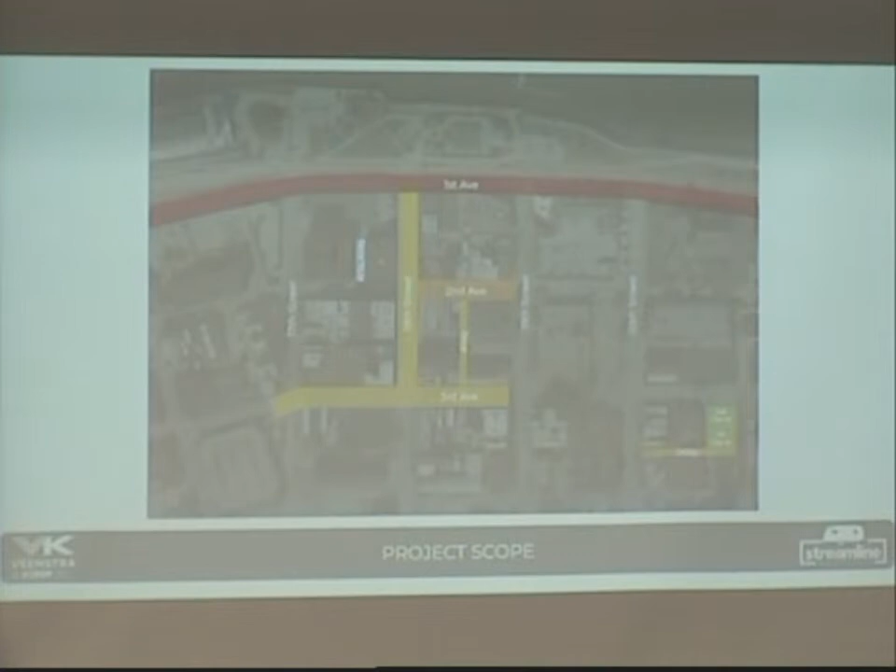Then when we had the online form, the 423 responses, the results were pretty similar. 55 and older made up 32%, 35 to 44 was 24%, and almost 20% was 45 to 54.

During the public meeting, for gender, there was 58% female, 41% male participating. Pretty similar in the Google online forms for female to male ratio.

At the public meeting, we polled everyone to ask where they lived - 84% were from Rock Island. When we did the online form, 73% were from Rock Island.

Just to give a general background on ethnicity: 80% were white or Caucasian, with the remaining 20% a mix of other ethnicities.

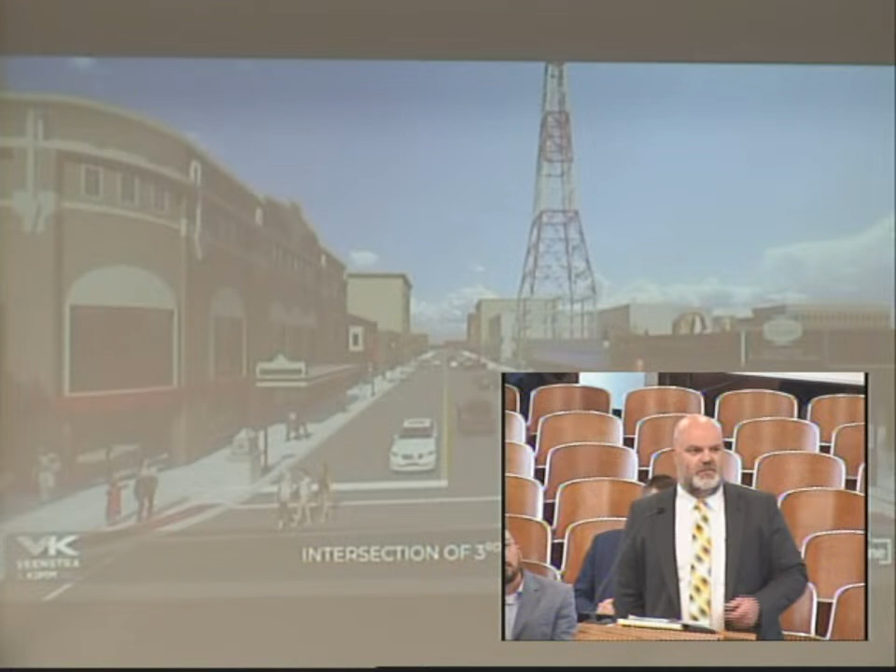So here we're looking at 3rd Avenue and 19th Street, looking west. On all the street projects, it'll be total reconstruction with new pavement, new sidewalk, and also new storm sewer, sanitary sewer, and water main. Just to let you know that all the underground will be replaced on all the road projects.

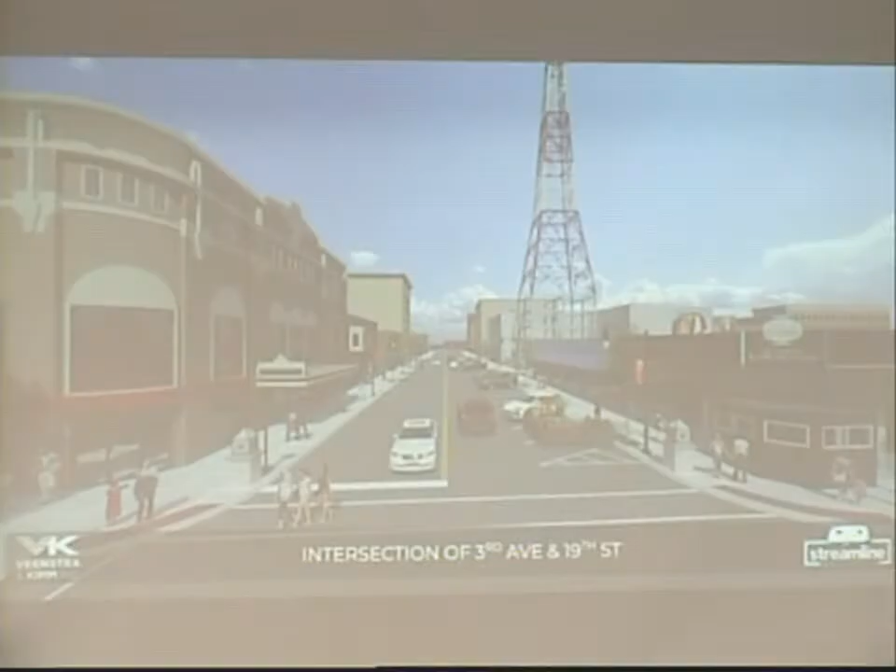So here we're showing some gateway column structures in certain areas, as you can see next to the Pancake House. Saloni will talk further about this—you'll see a parklet structure, basically an outdoor dining structure next to the Pancake House, which we'll cover further in the presentation.

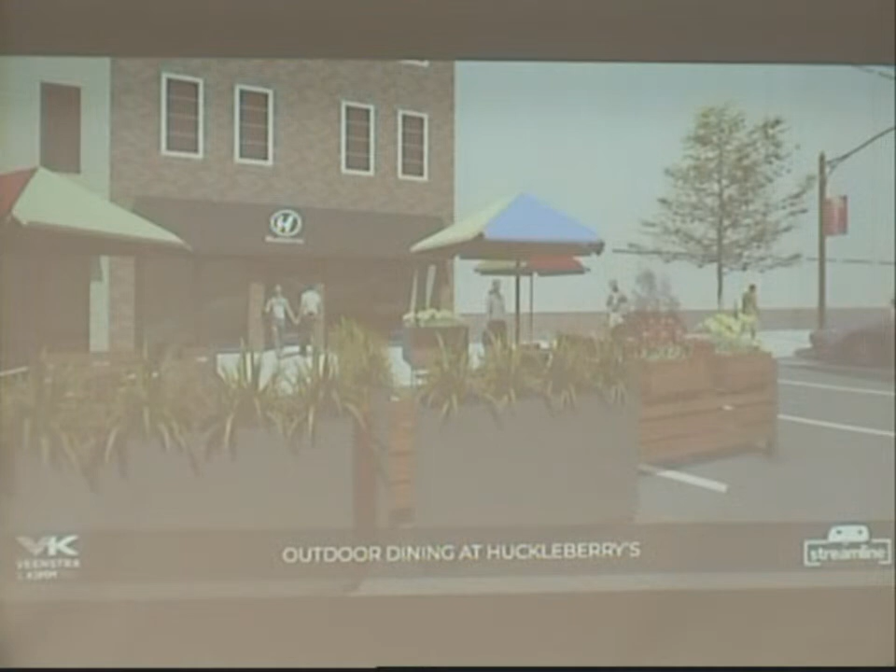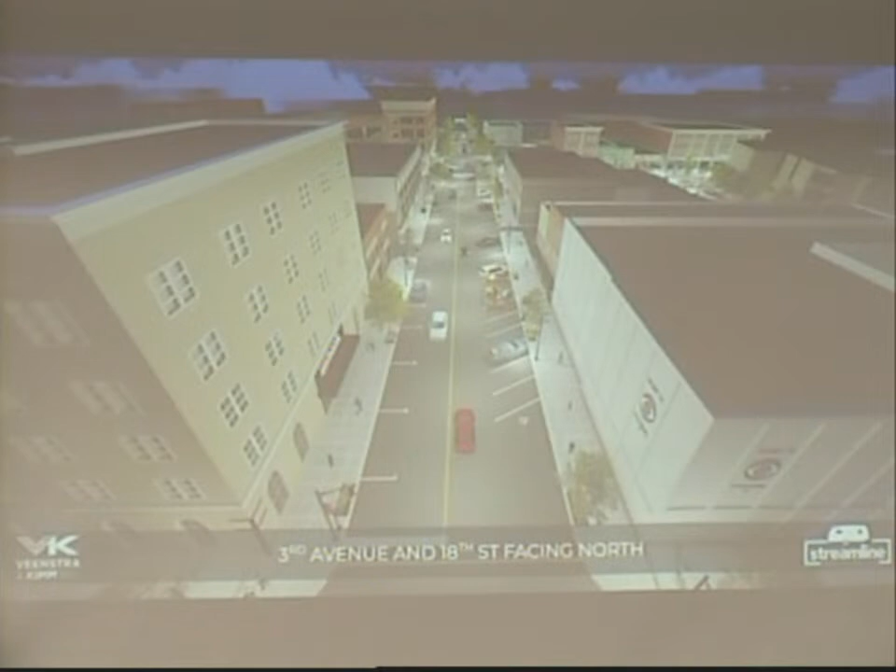Here's another outdoor dining structure that would be adjacent to Huckleberry's. Here's basically looking down 18th from 3rd all the way down to 2nd. It shows new lighting, new trees with landscaping, and they'll have new trash receptacles and planters.

Here's kind of looking down 3rd, from 18th to 19th. And here's basically the WHBF tower.

We'd originally proposed in the initial concepts just putting lights at the base and beaming them up, but due to the structure, it really wouldn't accomplish our goal of getting it lit up like we wanted. So we had to change to LED lighting all the way up and down the structure to get it lit the way we wanted.

Another thing we weren't anticipating is that we'd also have to take down the antenna to accomplish this. But we'd have different colors so you could program it for different times of year and different holidays. We think this structure could become iconic of downtown Rock Island—turning what might be an eyesore into a nice feature.

So here's an aerial view of basically 2nd Avenue and 18th Street. We're showing a roundabout to be added there as a focal point, and over to the right would be the Great River Plaza where it is now.

We were proposing taking that out and putting in a festival street, which would be a curbless street, so it would be the same level all the way through. I'll show you another.

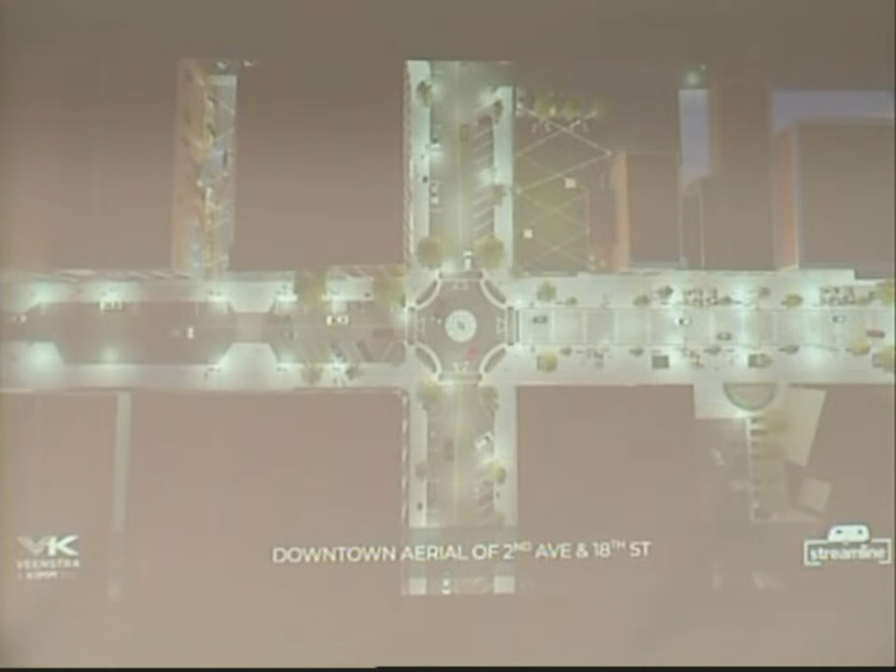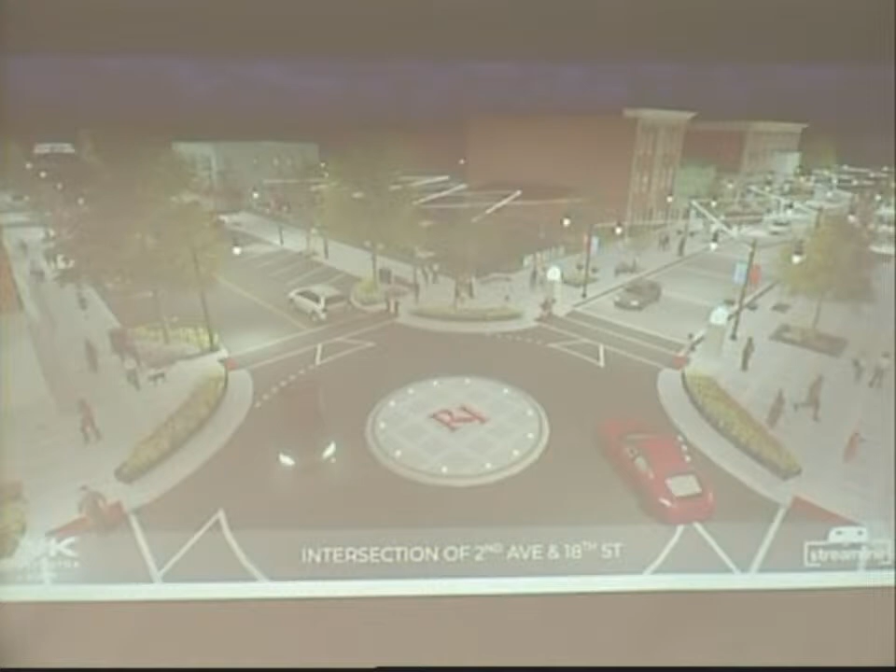So here's a better rendering of what I was talking about. As you look to the right, there's the Festival Street, which would basically be a curbless street, giving you a lot of flexibility. We'd also have demountable bollards at the beginning of 2nd and 18th, and over at 2nd and 19th, so you could close down the road anytime you wanted, or open it back up for traffic. It would just be one lane each way.

In the public meeting, we had a mix of some people that wanted the roundabout, but there was also a lot that didn't want the roundabout. So we put it out on Google Forms and asked the question if they're in support of the roundabout. It came back 63% were in favor of it, and about 37% were not.

As far as the roundabout, there are studies out there that show it increases pedestrian safety and also helps the flow of traffic. But there's also a lot of studies out there that show other things.

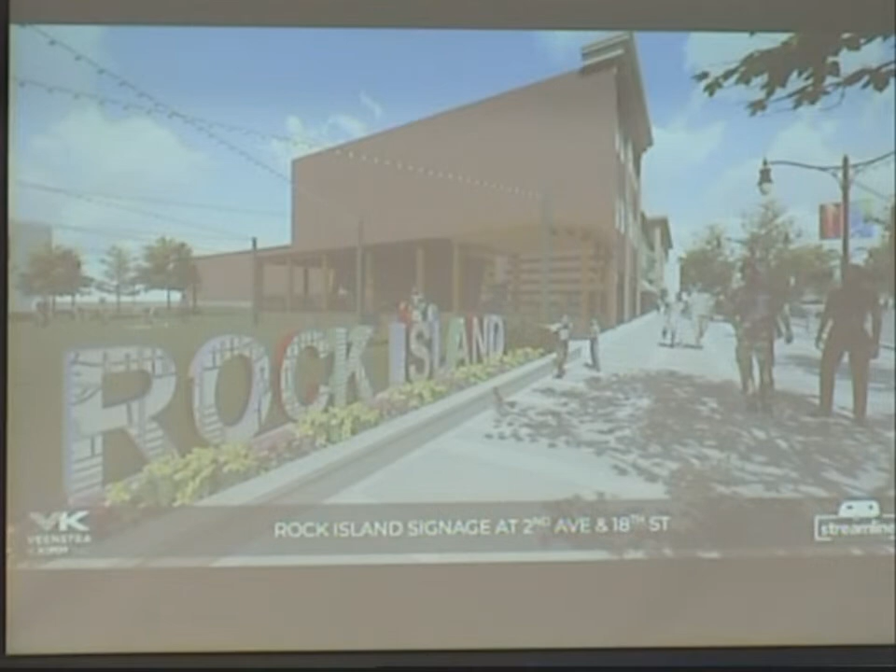So moving further down 2nd, Jason had talked a little bit earlier about outdoor dining structures for local businesses. Along 2nd and really sprinkled throughout downtown, we'd be looking at parklet fencing to create these outdoor dining structures. They'd be tied to a local business for additional seating space for them to expand, providing a way to support small business owners and give them a dedicated space to grow into with additional customers coming in.

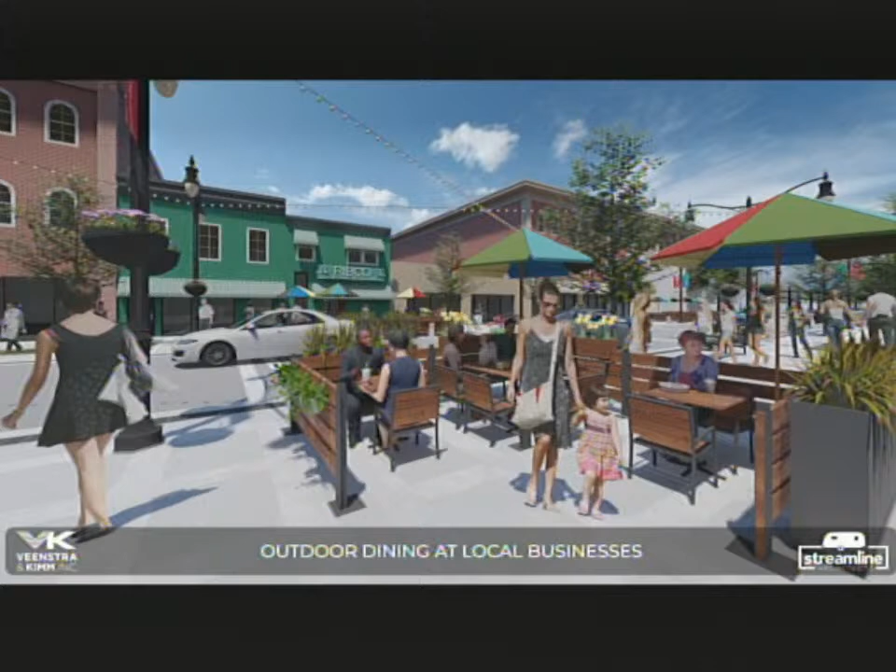So with these planters, we're proposing something with durable materiality that withstands weather, located on the widened sidewalks that would be on 2nd Avenue between 18th and 19th, or can be built into parking stalls and provide additional seating that way as well.

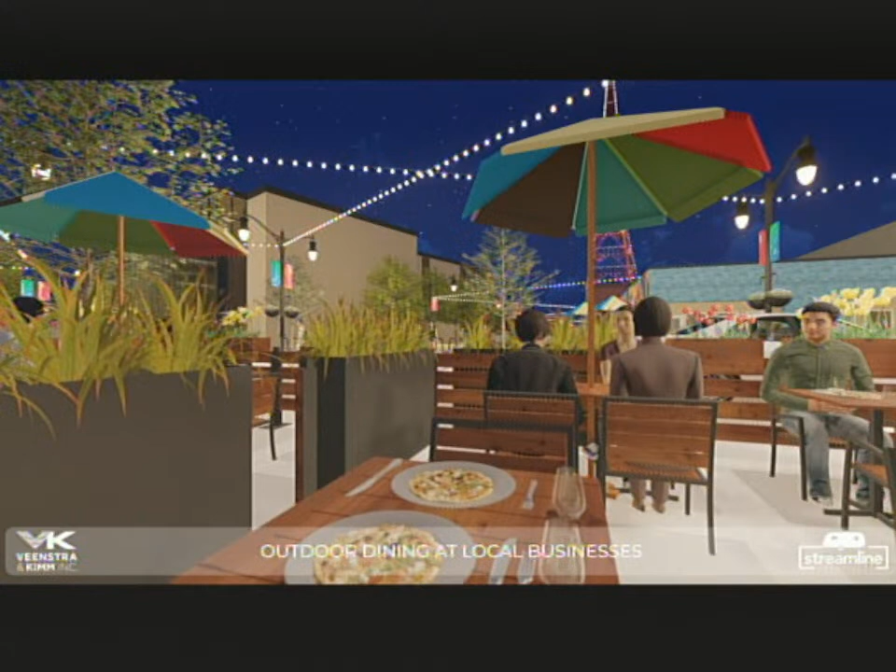By incorporating planters and landscaping, we can create a buffer between car traffic, because 2nd Avenue would have one lane going each direction, then a landscape buffer, and then your dining space there. These would be illuminated at night with the adjacent new light posts and string lighting as well, over 2nd.

So with these parklet fencing structures, the goal is for restaurants and business owners to have the freedom to set up the spaces however they want, whatever fits best for their audience, but provide a consistent aesthetic as you walk down 2nd Avenue, with all of these looking consistent the whole way down.

In the public meeting, we polled whether anybody visiting a dining establishment downtown would use one of these structures for outdoor seating. Between very likely and somewhat likely, we got 96%, so it was heavily in favor. On the online poll, we split the question for owners versus patrons of businesses. For owners, we were looking at around 75% combined very likely and somewhat likely. For visitors, around 85%. So it reinforced what we gathered from the public meeting.

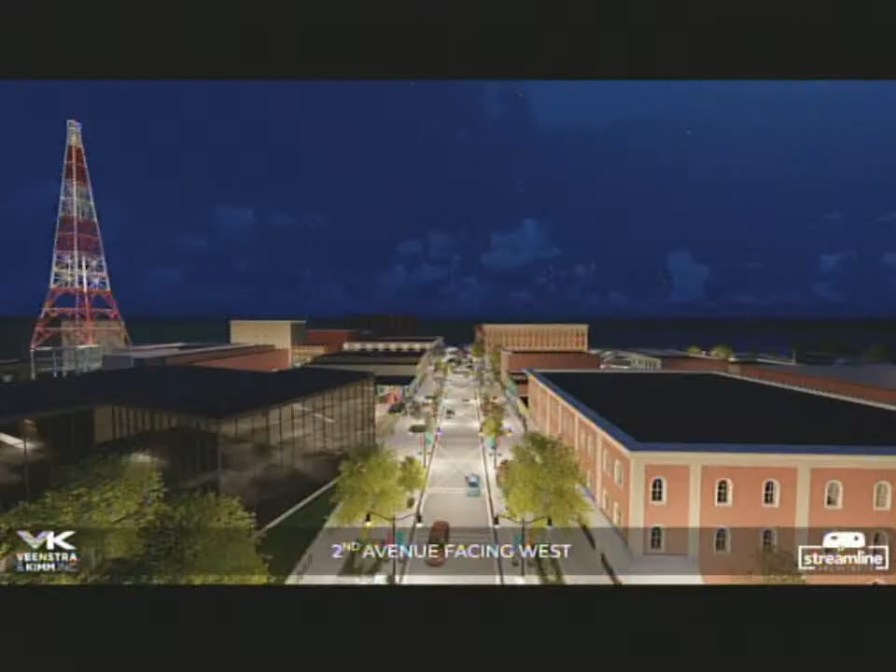Looking at an overview of 2nd Avenue: string lighting over the street, one lane of vehicular traffic in each direction here - this would be in front of the Starcrest building. You have the wider sidewalks on both sides, around 25 to 30 feet on either side, which gives room to program those spaces, provide outdoor dining, and bring a more vibrant presence to this area.

Because the area is still usable by cars, you're getting additional traffic through the space, but no long-term parking along this stretch. It's really intended to balance car traffic and pedestrians, keeping a separation between the two as well.

So with the widened sidewalks, these would be able to host a variety of events. This is on the side of the Starcrest building in that alley, showing a potential for pop-up stages that could be tucked into the alley, maintaining string lighting down the alley as well to draw people in, keeping a consistent aesthetic throughout downtown with design elements repeated throughout the space.

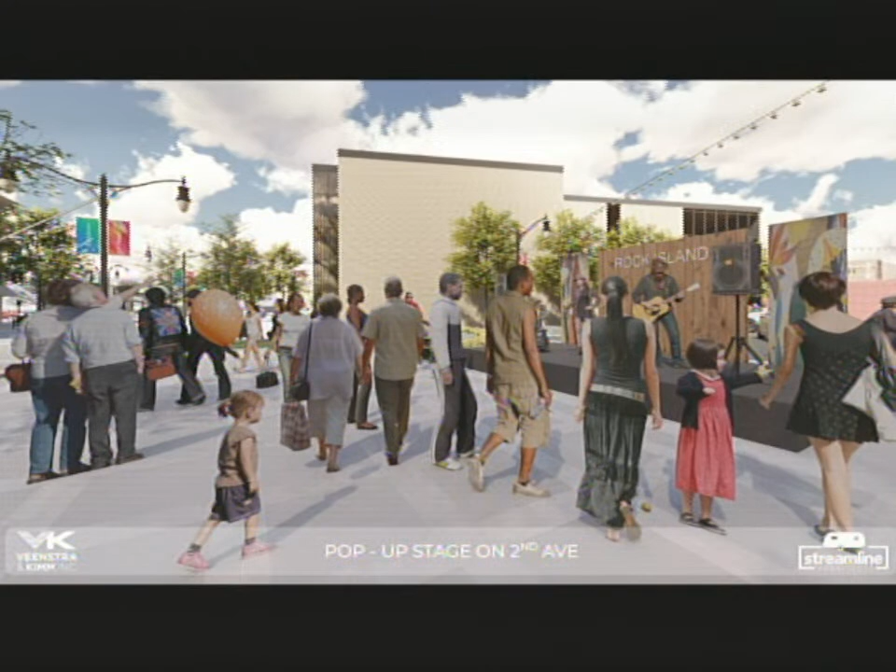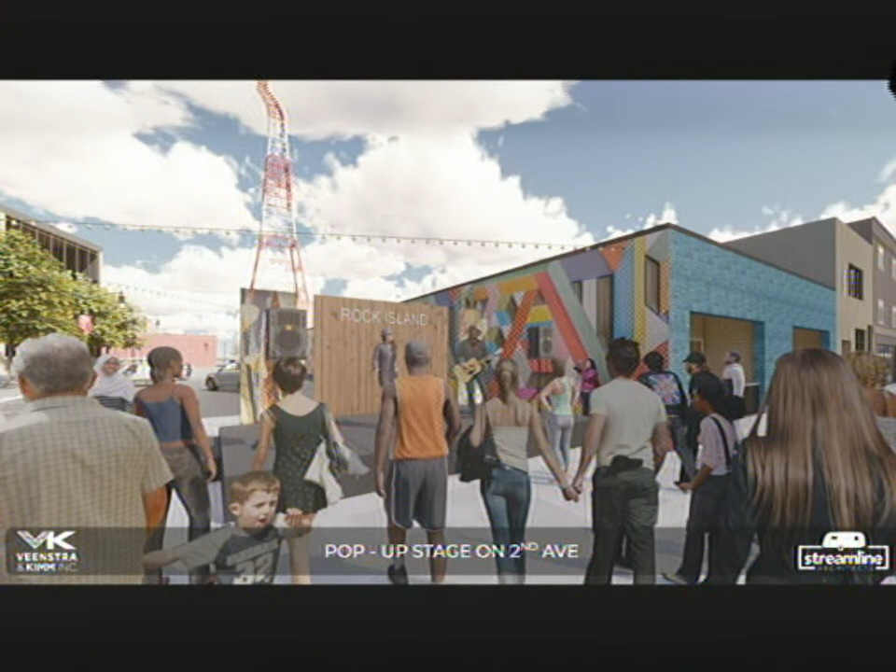So just another view showing small concerts, various programming that can take place here. You'll notice the WHBF tower in the background serves as an anchor regardless of where you are in downtown. Here we're also looking at murals that could be sprinkled throughout 2nd Avenue and downtown to tie in the arts - it doesn't have to be limited to just Arts Alley. It'd be nice to see it flourish all throughout downtown.

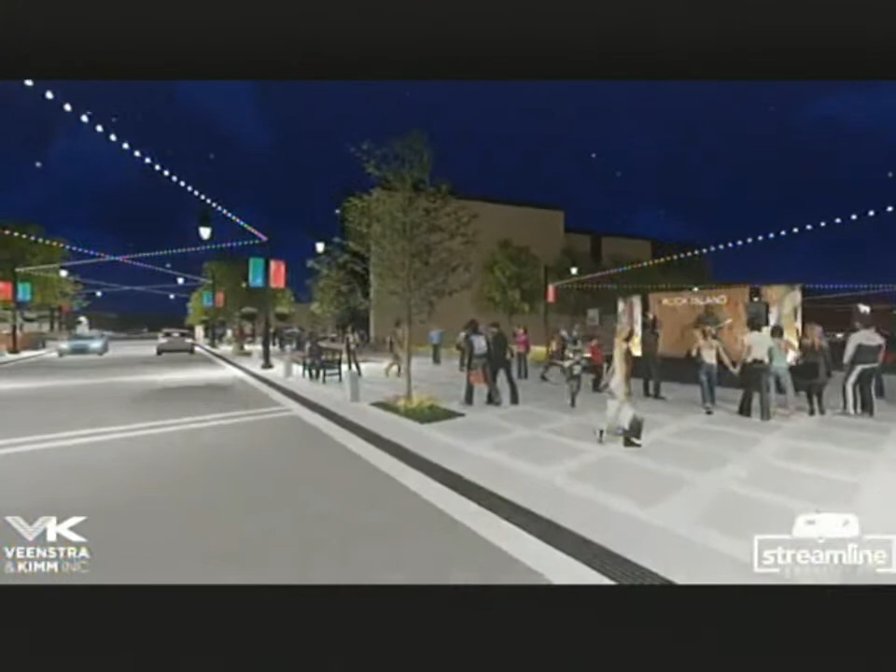In the public meeting, we asked how likely people were to visit Second Avenue if these designs were incorporated, and 87% said very or somewhat likely to visit. We asked the same question on the public survey to get feedback from as wide an audience as possible, and again got around 85% saying very likely or somewhat likely.

I'll pass it off to Drew to give a little bit more information on the outdoor markets.

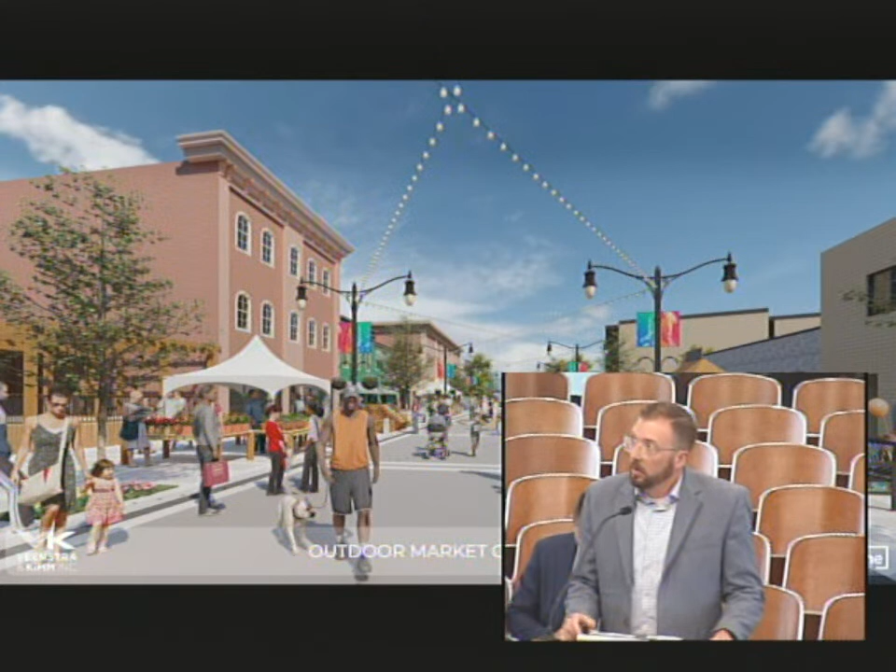Another aspect of the design is providing for outdoor markets throughout downtown, along Second Avenue, expanding on what we can provide at Arts Alley, where there are a few outdoor vendor stalls that provide that incubator space for businesses. For example, somebody starting at a stall may turn that into a business in a storefront, which may turn into a business as a building - trying to create that ecosystem of incubation.

These outdoor markets can not only be for farmers markets, but they can also provide for clothing and other pretty much anything you can sell that doesn't require refrigeration, though that even happens with Meathead's meat market at farmers markets. But plants and vegetables aren't the only thing.

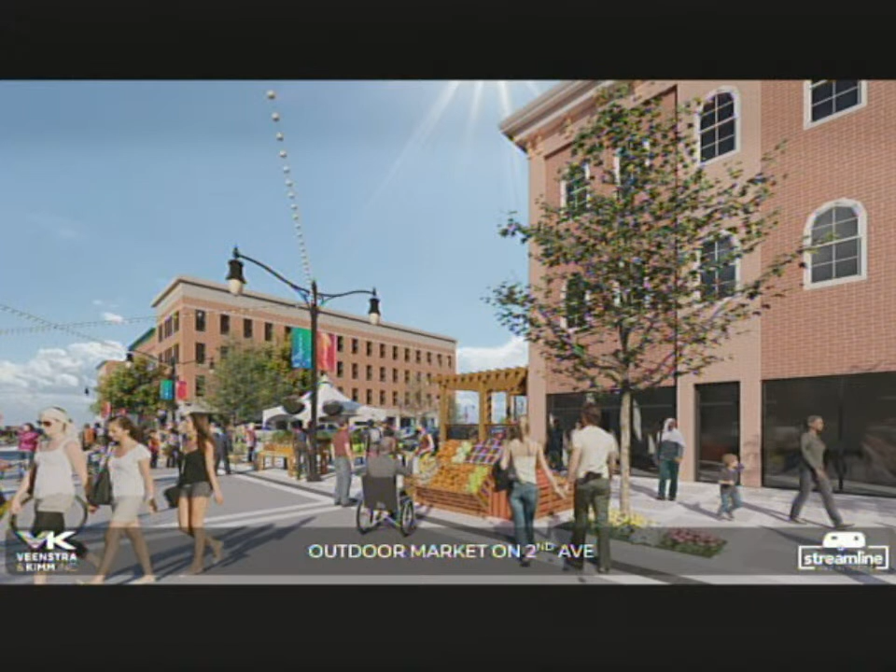Another view - I guess the big thing to take away is that we're hoping to provide a space that is inviting, an experience during the day as well as at night. Here's another animation of the markets.

So same thing, we polled the audience at the public meeting. Most everybody was in favor of it, 85%. Same question for the online poll - again, over 85% were in favor of having markets downtown.

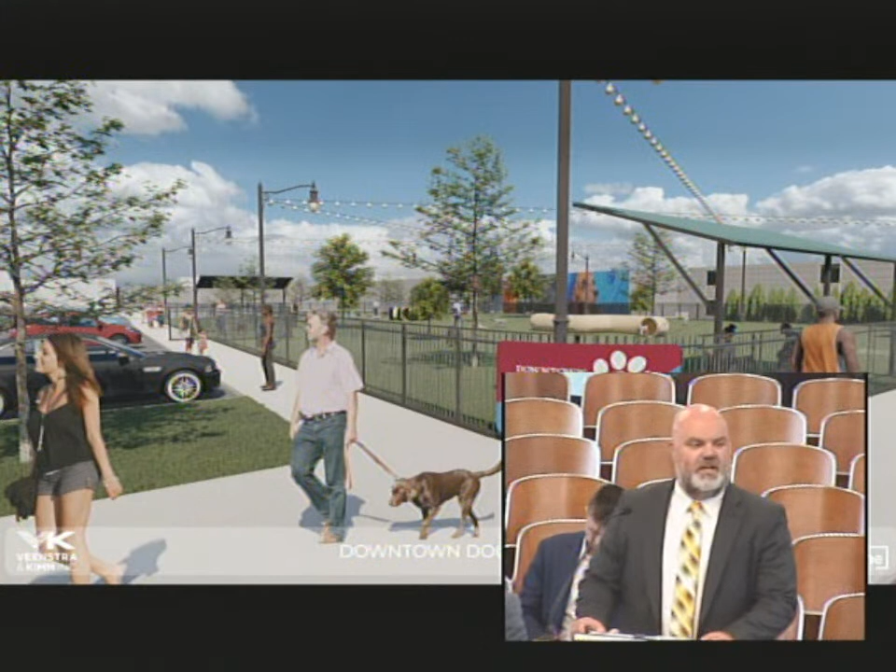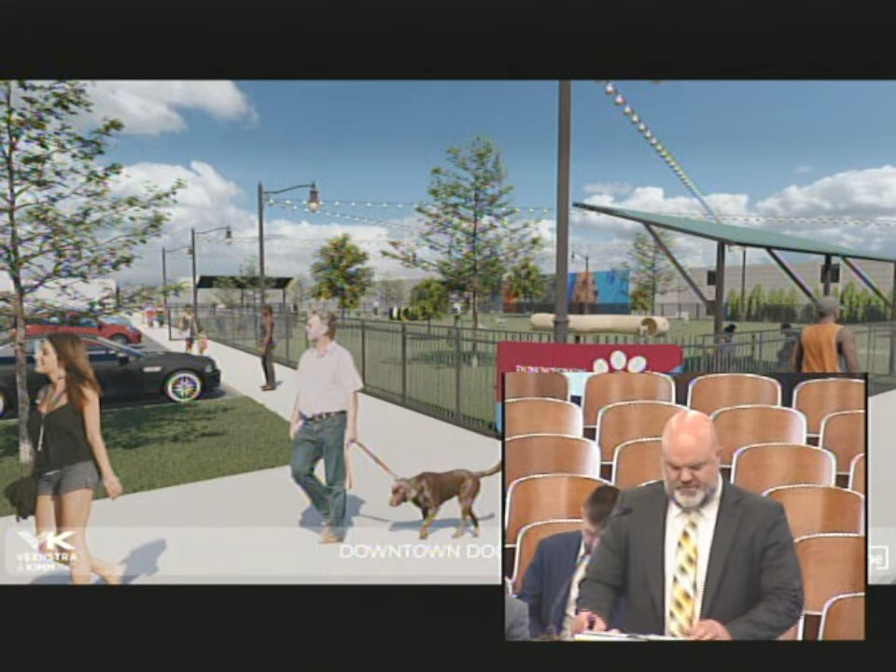I'm going to go through the dog park here. There's an empty lot right at 3rd and 20th that will be the location of it. The creation of this dog park - dog parks promote walkable neighborhoods and enhance a sense of community of individuals walking their dogs. The dog park would increase foot traffic in the area, so this would be a great amenity to the whole downtown.

So here we're looking basically at the corner of 3rd and 20th, looking to the southwest. The features here would be the sign at the corner with lights around it, with string lighting. There'll be some shade structures and some drinking fountains.

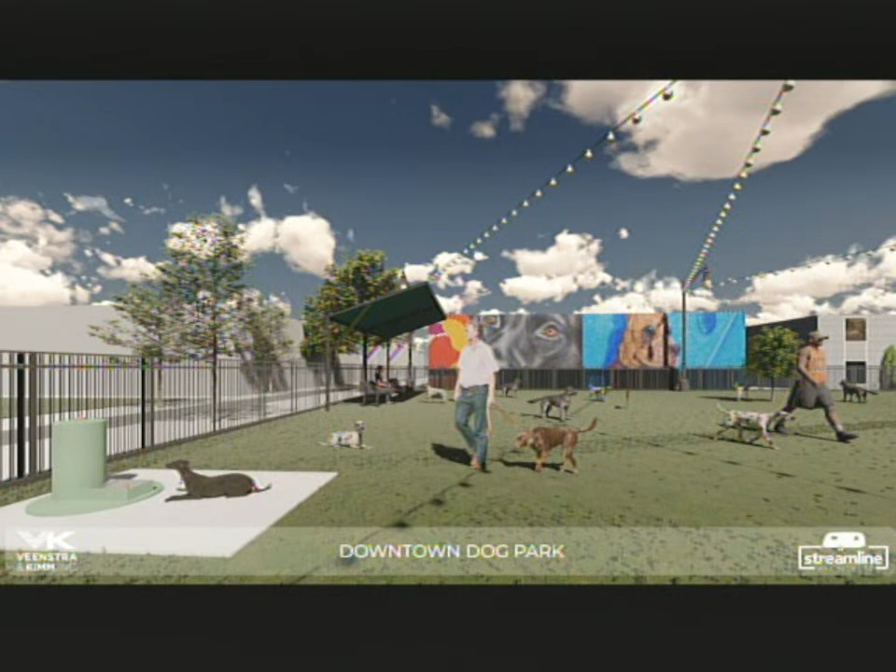One unique feature of this dog park, to reduce maintenance, would be to add a specialized synthetic turf for dog parks. This wouldn't have to be mowed - it would just have to be rinsed down a few times a year and disinfected. So that would be a great advantage of putting in the dog park synthetic turf.

As you can see in the background, part of this project would be to work with Quad City Arts to get a mural in the background. It's budgeted into this project.

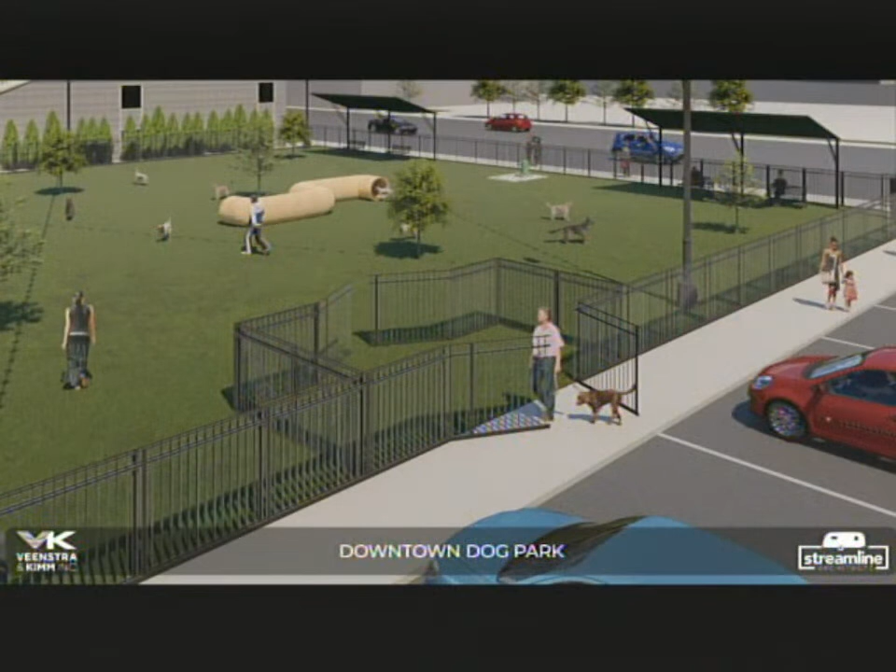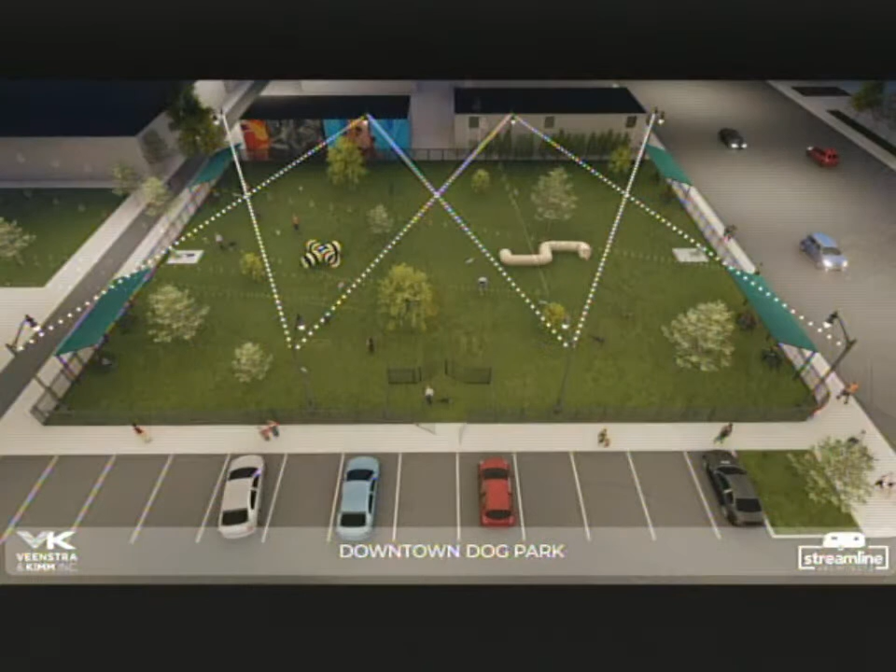There's just another view - there'll be a few obstacles in the middle with some trees scattered in for shade, along with some shade structures and some benches. One thing that was kind of an add-on was basically to mirror the parking on the other side of the street, and put it on this side for the dog park, and then redo the sidewalk around the perimeter.

Also, on the left-hand side, part of this project's budget is to redo that alley, between 19th and 20th, on the south side of the project there. There's just another aerial view.

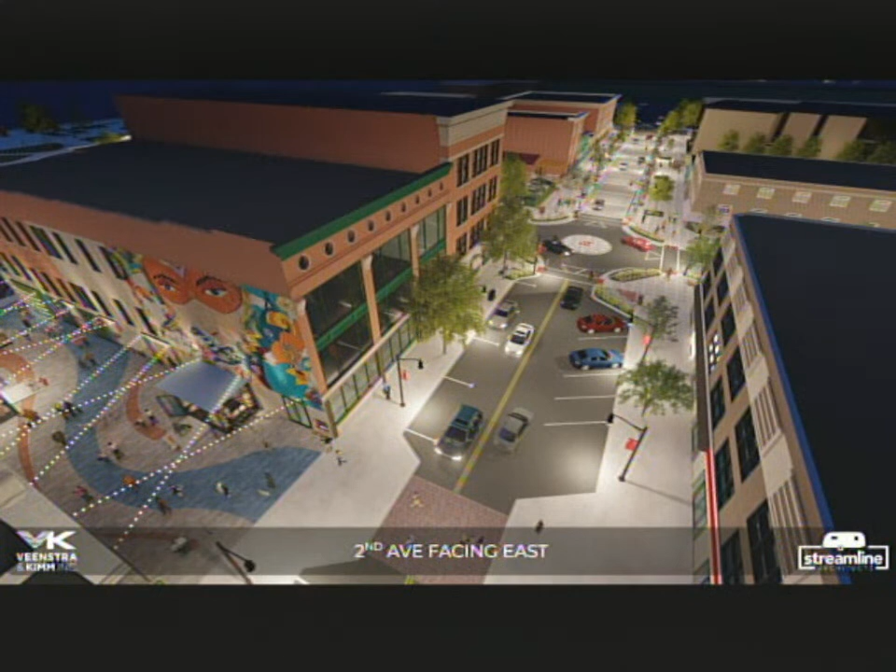So I'll turn this back over to Saloni to talk you through Arts Alley.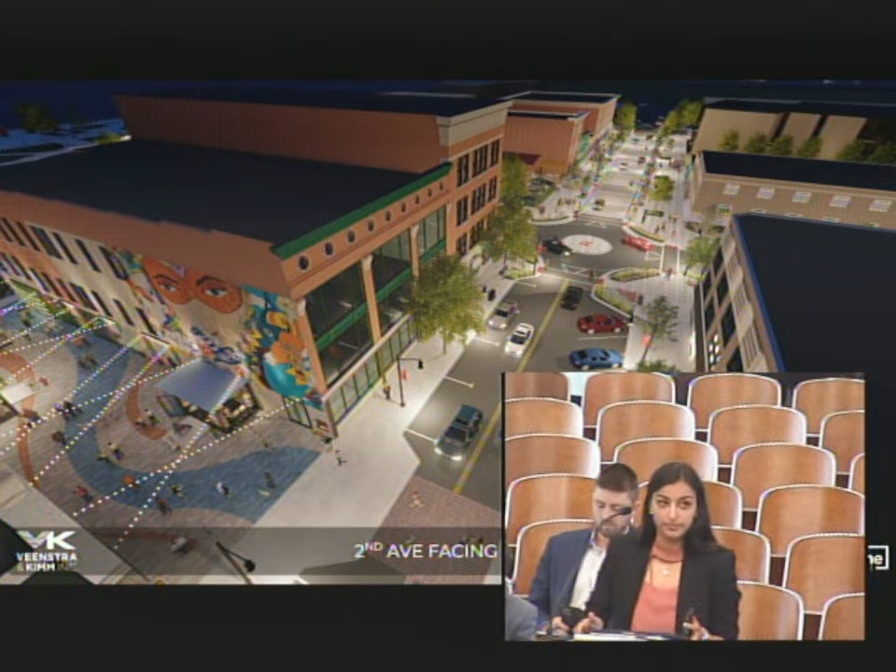Okay, so Arts Alley is located between 17th and 18th Street along 2nd Avenue - the alley you're seeing on the left side of the screen. This is showing the connection from 2nd into that alley space. We look to maintain similar string lighting overhead to draw people in and keep that look consistent the whole way through.

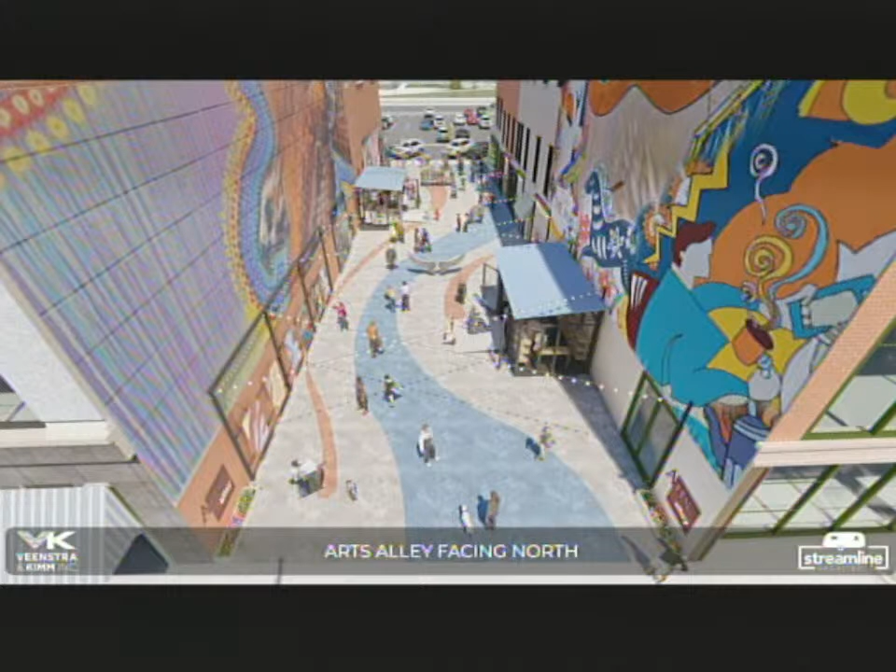With Arts Alley, we are proposing stained concrete along the ground to bring people in and move them through the space, with colors tying into Rock Island's logo again. The murals shown here are just placeholders - we'll be working with Quad City Arts to actually create those, and add designed elements throughout the space as you walk down, to give people a reason to come in, move through the space, support the small businesses located there, and provide new ways for the community to use this space.

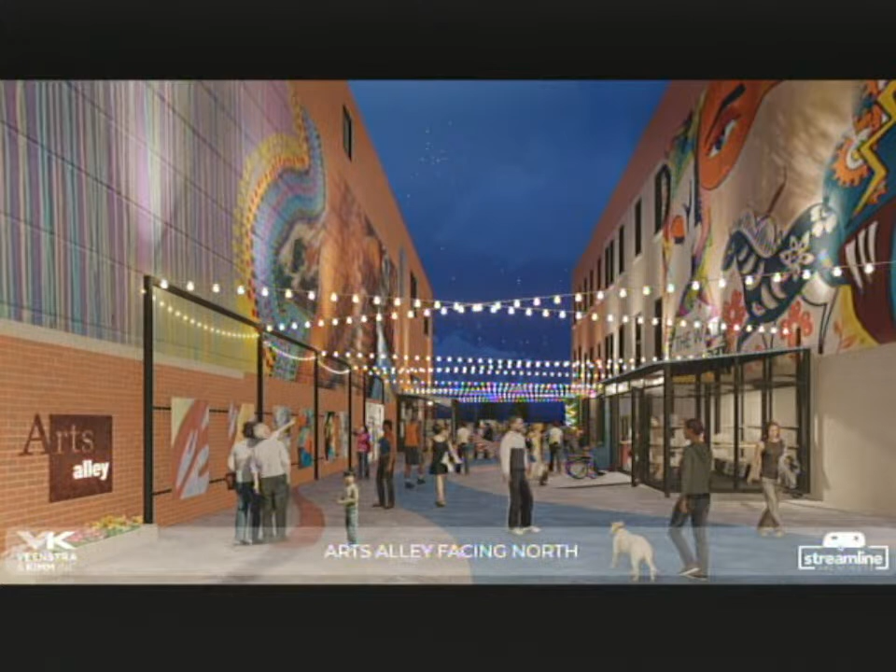So looking north in Arts Alley, we have entry signage on both sides. The same thing you're seeing on the left will be on the right, to be an entrance, a focal point as you're walking down 2nd, to bring people in. We're also adding structures along both sides of the buildings to support an outdoor gallery, essentially, of artwork that can be changed out seasonally or annually, however the city and Quad City Arts see fit.

There's also potential in this area to do movie screenings and host more interactive events like that. With the vendor stalls that Drew had talked about earlier, providing a space for artists and local smaller businesses to be able to promote their work and give them a space to grow. Things like this vendor stall would give visibility to smaller businesses.

The intent with these is to have different vendors or creators in the spaces throughout the holidays, to be able to switch them out, bring new people in, and keep a changing audience coming into the space in these incubator stalls. We're also looking at adjustable interiors with mounting and shelves, to be able to display a variety of things, for example pottery or paintings.

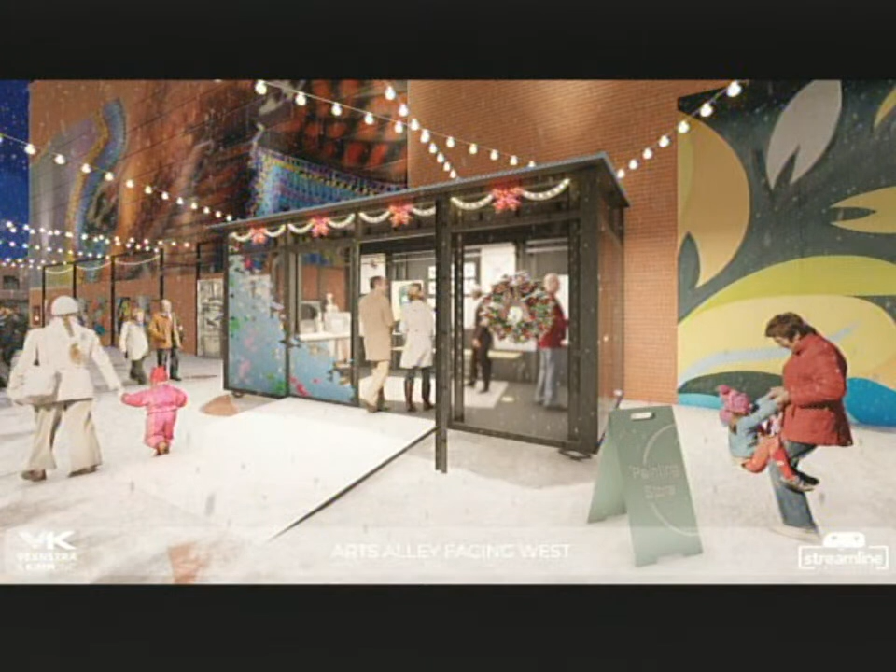With them being seasonal stalls, we wanted to throw in an image here of wintertime potential use. These would be heated and cooled, so envisioning some sort of Christmas market in here as a temporary structure.

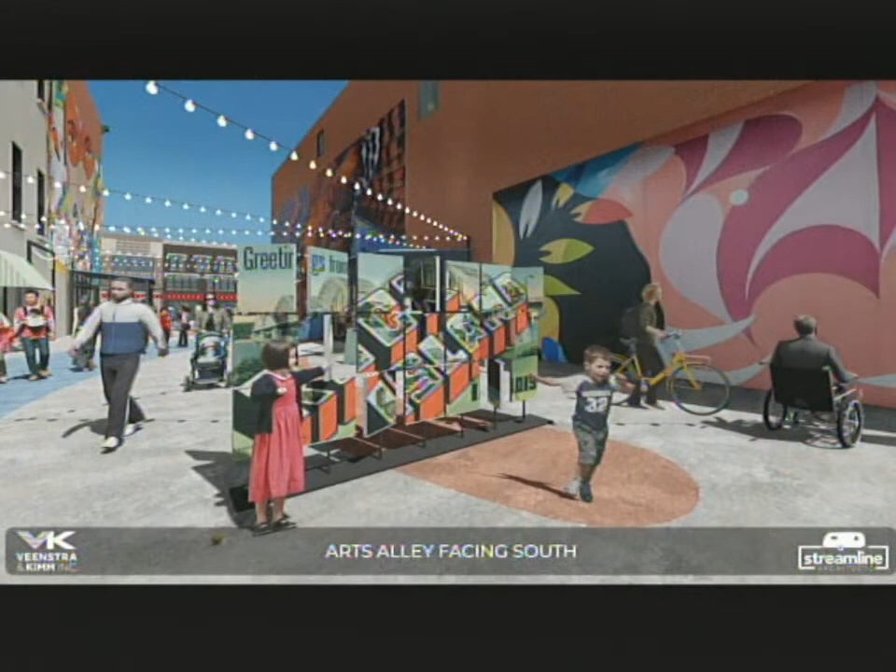With Arts Alley trying to incorporate more interactive pieces, we incorporated this play structure, I guess you can call it, for kids, such as this puzzle activity, creating a space for younger audiences to come here, not just for adults or parents, but wherever their kids go, parents will follow.

This shows the Rock Island postcard, the iconic postcard on one side, and on the other we're proposing something like Irma Renee Koen's artwork. She was the artist who used to have a studio in this alley before that building was demolished. So we're trying to find ways to bring in local history and tie that into Arts Alley because there's so much history in this area.

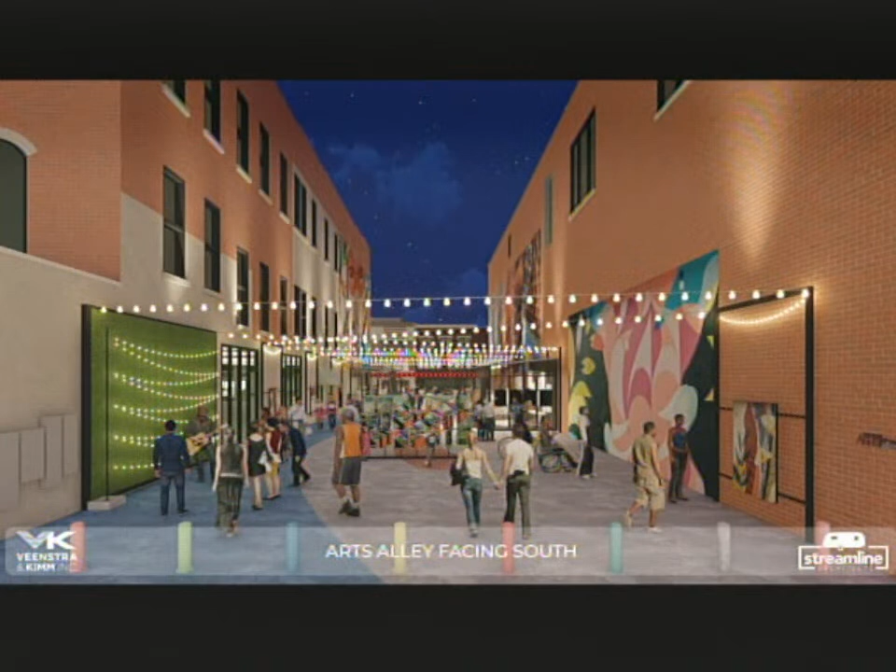On the north side of the alley, facing south, we would be looking at incorporating a green wall type space. That could be a backdrop for smaller performances. If there's any sort of event happening in Arts Alley, it would be a good place to have some music going and new ways to bring people into the space.

You'll also see along the bottom here removable bollards, so if there are any food trucks or larger sculptures that need to be brought in, anything like that, you have the potential to work with that in the space and make it work for you.

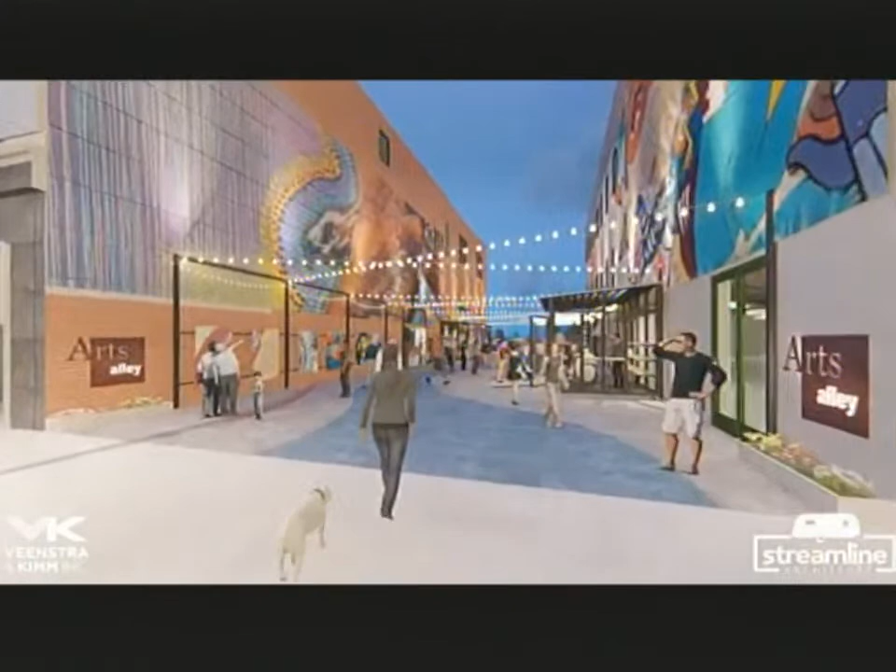So now we have a quick walkthrough of Arts Alley. We have the outdoor gallery of paintings along the walls, murals overhead, the string lighting that crosses over the top, and vendor stalls as well.

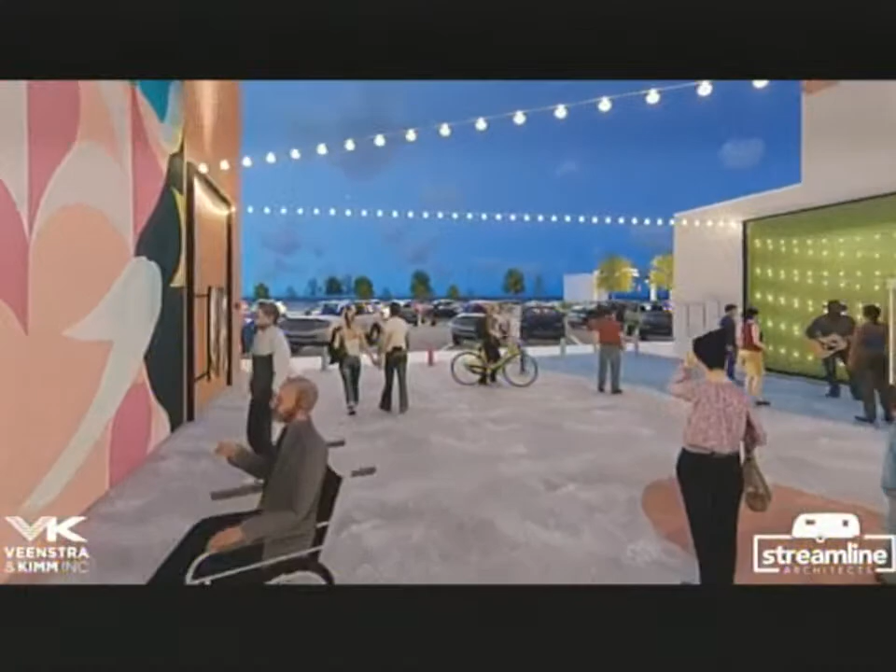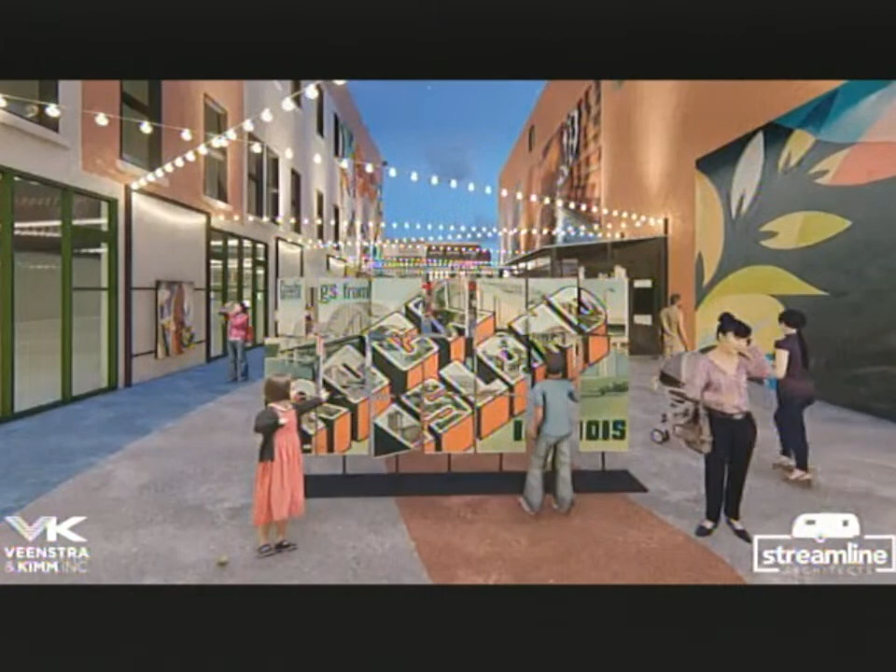We asked in the public meeting, how likely are you to visit Arts Alley if these designs are incorporated? We got 86% very likely or somewhat likely.

Now we will talk a little bit more about overall concepts for Rock Island.

We had polled 423 people in the forum. Roughly 250 were positive responses. We had about 40 that were not related, and the remainder were negative responses. There are a lot of comments, and I'm sure they're all available to you if you want to read through those.

The concepts for downtown, our hope is to bring life to downtown and create a place that is inviting throughout the day and at night, for businesses and residents and the Quad Cities. Throughout the comments, a lot of those are called out as the concept is developed.

One of the things is to talk through some of the design elements that will carry through downtown in the future, on different phases if more phases come. We have some identified and some we're still working on identifying through the design process.

So this one right here is a typical section, basically a cross section of the roadway. It'll basically be concrete pavement, 8 inches of concrete pavement, and then 6 inches of sidewalks.

Depending on the street, you'll either have diagonal parking or basically parallel parking on one side. We will work on reducing the pavement widths to give more room for either outdoor dining structures or other elements that storefronts may want to put out, like selling items or different merchandise. So in the design process, we'll look at minimizing the roadways and expanding the sidewalk areas.

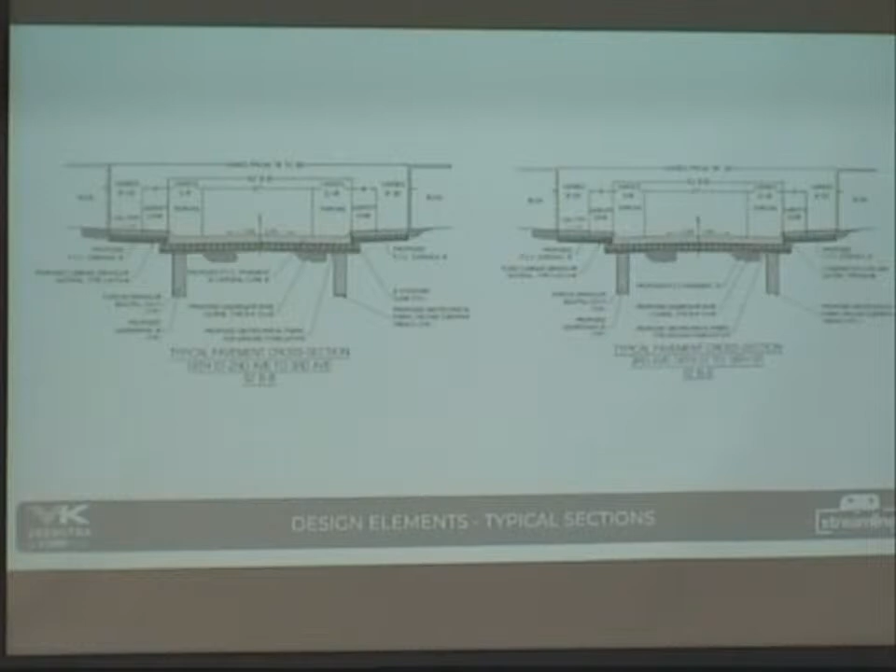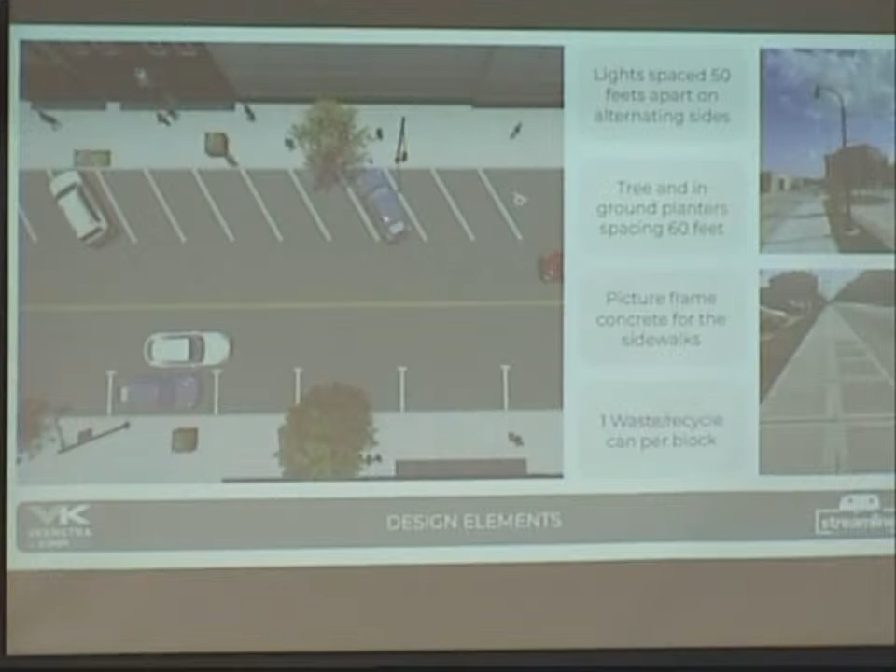Here's an aerial view of what's on the left side there. One thing we've identified is the light spacing is about 50 feet apart, but on alternating sides, so they'll alternate throughout the space. The trees and in-ground planters will be approximately 60 feet in spacing, whatever we can get. There will also be a picture frame concrete sidewalk, pictured over to the right. And the light at the new parking lot across the street at City Hall, we'll be using that same light throughout downtown.

As far as different elements like waste receptacles and planters, we'll be working through that in the design and coming up with kind of a standard for that.